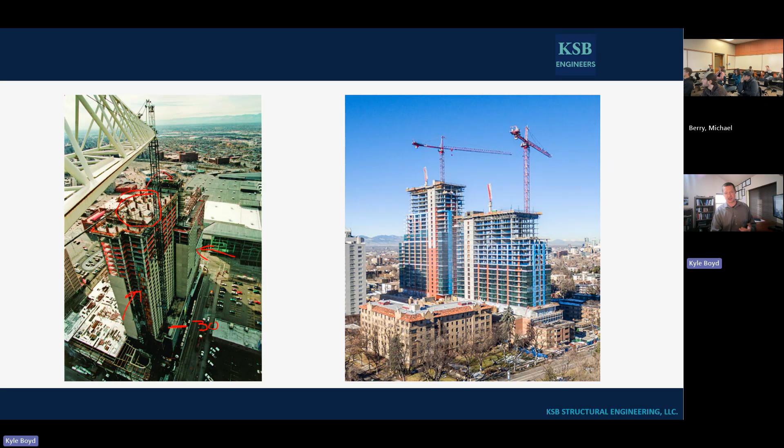As we go on, here's another building in Denver. This particular one, they were fixed on the number of stories they had - just coincidentally, it was another 30-story tower.

With post-tensioning, being able to save that foot per floor, there's over 400 feet of exterior lineal footage of skin around this building, times 30 feet of floor we were able to save, 1 foot per level, times almost $40 a square foot for your exterior skin. Once you install labor and all that, we were able to save $500,000 on the project right there, just on exterior skin.

Not even having to do things like - every foot you go up, that's additional foot of plumbing running vertically in your chases, HVAC running vertically all the way up. Again, more wind and seismic means bigger core walls, shear walls going down the building, bigger foundations. It's a domino effect of these savings.

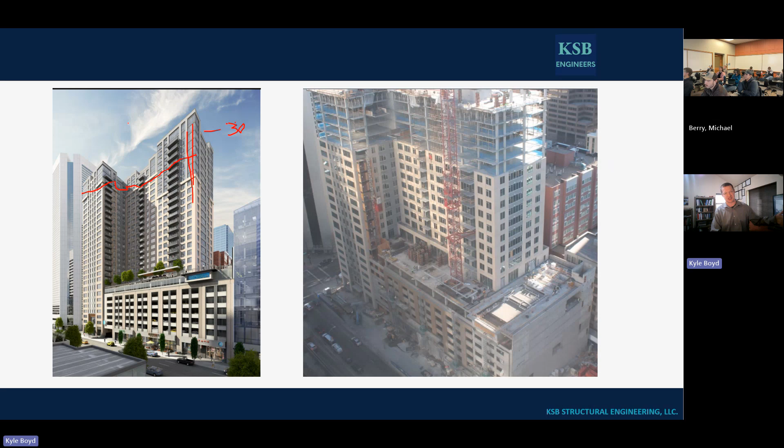With these post-tension slabs, there's so little material that goes in there that you're able to pour a floor a week if you get your schedule right.

Here's another tall tower, and you can see up here this is all the formwork for the level going up. They were able to put in all the reinforcing, pour the concrete, stress the post-tension tendons, drop the tables, set them up on the next floor, and repeat that cycle once a week, which is a crazy fast schedule.

One of the tricks of doing that is after you pour your slab, that same day, as soon as you're walking on that concrete after you broom the finish, you're over here pouring your columns on top of it.

The reason you can go so fast is from the reinforcing standpoint, you only need about a day and a half to 2 days to get your reinforcing in. You can see there's really no rebar in the slab - only a little bit of rebar over your column heads right here, you can see the column there. The rest of the rebar is just to support the PT tendons at their elevation - it's just support steel.

You might have a little bit of localized reinforcing at some blockouts. This was a shear wall right here going up, so we'll have a little bit of steel to drag some of that load in for wind or seismic into the core wall there, but really not much.

So you're able to lay this out pretty fast, accelerate those schedules. That acceleration of construction schedule you see with post-tensioning - every week they're able to shave off is a week less they have to pay for job trailers, superintendents, and what's called general conditions that the contractors use.

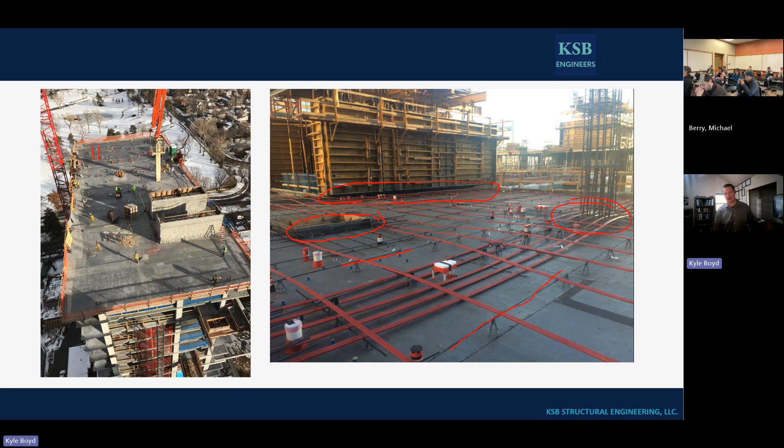Those general conditions costs are extremely high - there's builder's risk insurance, a lot of things that go into every week you're live on that project. So if you can save a month or two on your schedule, on your critical path, just by choosing a building system, that's another big domino effect of using post-tensioning.

Other areas we've seen it - here is another building we did where they owned the airspace but didn't own the ground space. So we had to do a 180-foot long transfer girder that supported the rest of the building sitting on top of it. Down below, this was owned by the city.

This was a bus lane that came through here. They were able to get an easement and put a single column right there, but they had to go up 40 feet before they were allowed to do a building. It's kind of a weird concept to think about, owning the airspace but not owning the real estate down on the physical ground itself.

To do that, we did this 180-foot girder, supporting this entire side of the building right here. We were able to do that with post-tensioning because we used the drape in the post-tensioning - it's kind of a smiley face drape through here - to pick up 80% of the building weight on this face.

On the right hand side, you can see a picture of this as we were going up, getting out of the ground. What we did was we slipped the concrete cores going all the way up, because it was a steel office building.

Once you got up above the parking levels, it was steel from here on up. So you slip the concrete cores up to get them out of the critical path. It was a parking garage, a one-way post-tension slab. Then above that, this is where that big transfer girder came across the bus lane over there.

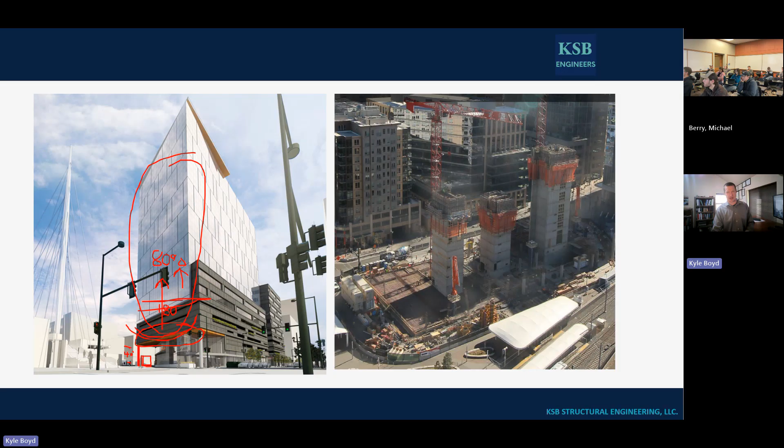Another use you're seeing in Bozeman and throughout Montana more and more is these podium structures. A podium structure is where you're transferring out 4 or 5 stories of wood up above, traditionally. That's usually because your bottom level is either too tall to do wood, or your bearing walls don't lay out with the architectural program down below, like open amenity space where you walk into the hotel, and you don't want all these walls going in there.

So you do a podium slab, which is essentially a two-way transfer beam, a two-way flat plate transfer beam that you're staring at.

This particular one's in Atlanta, and we did 12 stories of light gauge steel on top of a single-story podium. Here's a picture of that podium with all the reinforcing. There's a lot of stuff in there, but this podium was only 24 inches thick, 2 feet thick, and it was holding up 12 stories of building above it.

The podiums you'll see with wood are usually 12 to 14 inches thick, somewhere in there. The reason they can be so thin is you're using post-tensioning to pick up that load, and you're also putting pre-compression into the slab itself.

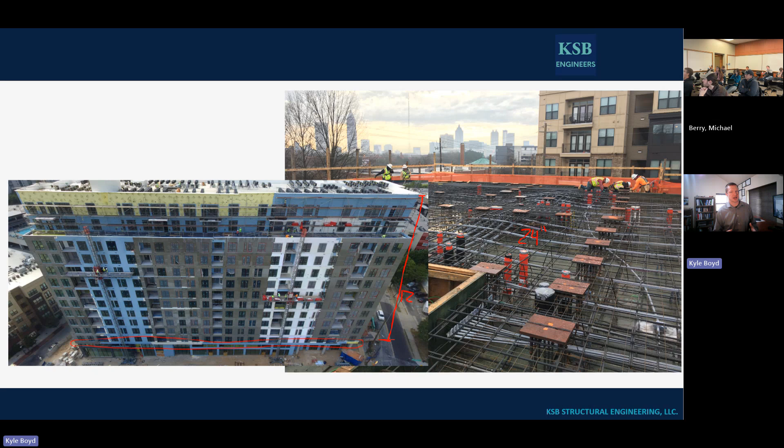So those are the applications and reasons to use post-tensioning. Post-tensioning is not new, it's been around since it started coming out in the 60s and 70s. They did a bunch of testing on it, so it's been well established for over 50 years and used throughout the country. It's not a new concept. It's new to being taught at the university level, but not new to the industry out there, aside from Montana. The rest of the world knows of post-tensioning and uses it pretty heavily.

It's one of those things where you want to put a lot of effort in your career back into professional organizations, PTI, ACI, AISC, whichever one you love. But that's not where your money is going to come from. I watch engineers put hours and hours toward these organizations but not toward business development or chasing new work or following the dollar symbol. I think it's important to balance both as you start looking at extracurricular things in engineering. Give back to professional organizations, be an active member, don't just join a committee and do nothing. But also put a lot of time toward business development and being more efficient as an engineer and as a company, since at the end of the day we're in this to make a dollar.

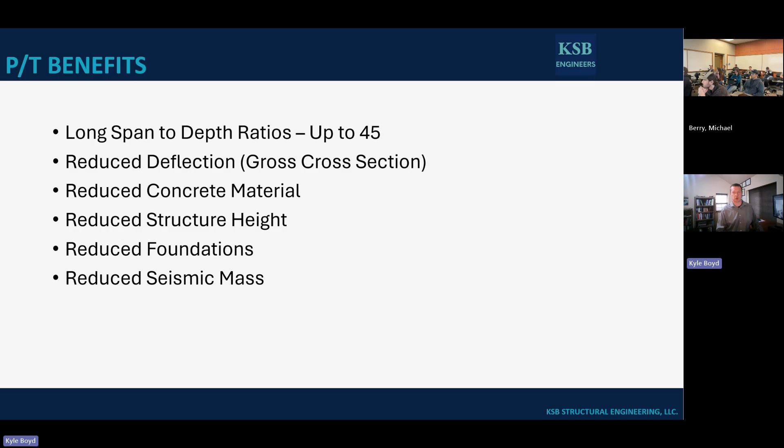So now we're going to dive into what even makes up these post-tensioning systems, what do they look like. We're going to start at the tendon level. When we say tendon, the definition is everything that's put together - the grease, the sheathing, everything we're going to talk about. Strands is just the steel in there.

Tendons, sometimes when you're doing bonded systems, can be multiple strands that run through there, multiple groups of steel. In our case, a tendon, because it's unbonded, is only going to be a single piece of element that's running through your slab. So that single piece of element is going to be a 7-strand cable.

It's going to have a center strand in the middle of it. That center strand is the king strand, and it runs right down the gut. Then your other six strands spiral around it.

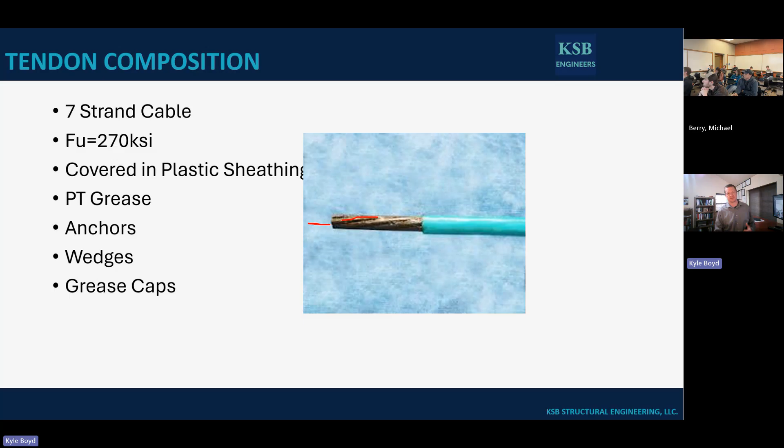It's unbonded, meaning it's never going to bond with the concrete. So to prevent that, there's plastic sheathing, that's what we're looking at, this kind of baby blue looking thing over the outside. Then there's grease coating all this stuff in there, and that grease does a couple things. One, it adds corrosion resistance to the strand. Two, it allows it to slide smoother throughout that extruded plastic sheathing.

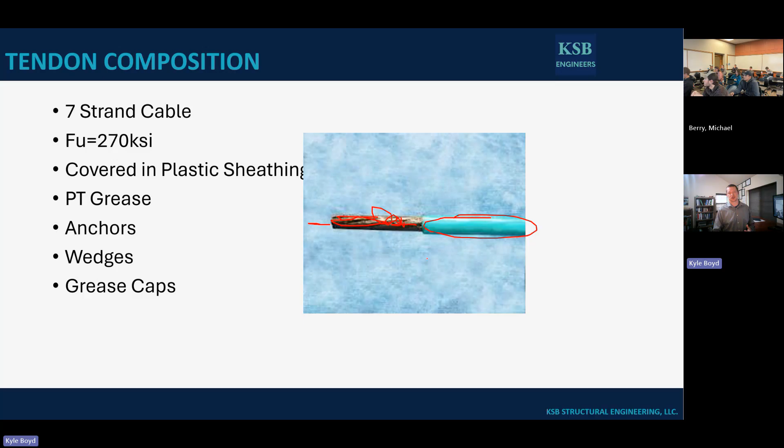That plastic sheathing isn't just like a hose sheathing. It's actually extruded onto there, so it's got the same exact shape as the strands as it pulls through. This system remains unbonded forever. So if you were to ever drill into it, the thing would pop and you'd lose all your tendon force, because there's nothing bonding it to the concrete. There's no development length, no force transfer length associated with it because it's unbonded all the way through.

The anchors, when you look at the end of the anchors, if it's elevated post tensioning, it has to be encapsulated. So you can see the red, that's just hot dipped in plastic for corrosion protection, but it's really a steel anchor. They're a little wider, like 2.5 inches by about 5 and some change inches in each direction, and that's going to transfer all your force into your slab at the end.

Whereas when you're looking at bridge girders, that force is being transferred just through a bond, through some length of transfer between the tendon itself and the concrete. Now we don't have that bond, so we have to have a way to get that pre-compression to the slab. That's going to go through one of these anchors you're looking at.

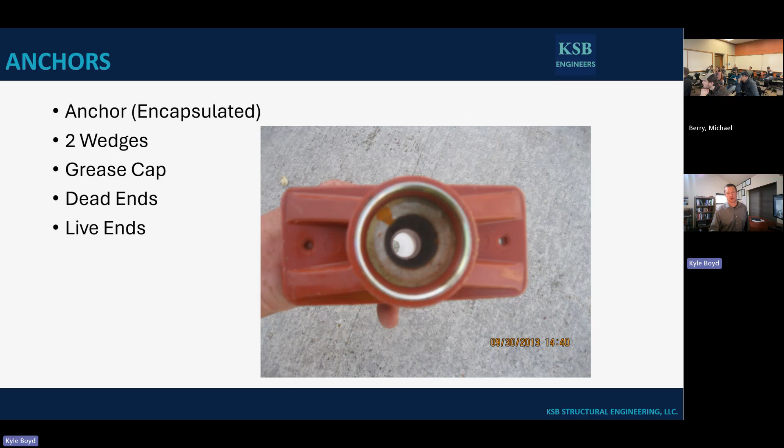So you pull the tendon, then you release it. These wedges aren't the exact shape of your cone, on purpose, but they're close. They're going to suck into this cone shape as that strand tries to pull back, and they act kind of like a Chinese finger trap on one side. The teeth grab that strand and won't let it slip.

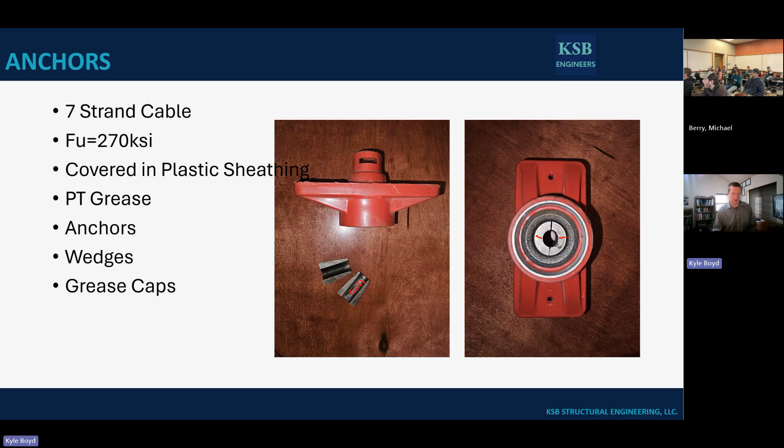That force, when you stress them, is about 33,000 pounds. You release it, and it usually drops right around to 29,000 pounds, with some immediate losses from these wedges seating into the anchor, and the elastic shortening of the slab from P over A. You're going to lose some of that, and you're also going to lose a little more from friction. We'll talk about that here in a bit. But that's how we transfer the force in.

Now again, it's got to be encapsulated, meaning it has to be waterproof. So at the end, there's a little plastic sheathing cover in this really blurry picture that covers the end for waterproofing. We already talked about the extruded sheathing. Then you have what's called a grease cap, just a plastic cap that screws into the end of this thing after you cut your tendon tails.

Now you have a waterproof system in there. And so that's what your anchorage zone looks like with these unbonded tendons.

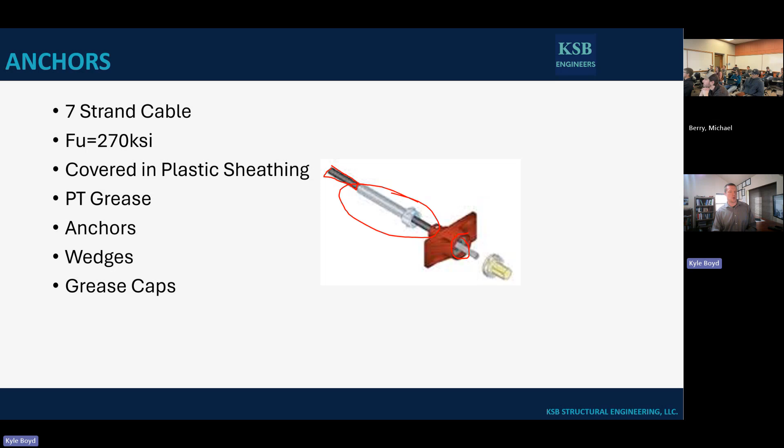So if you were to look at a tendon in the field, you're going to see the anchors, you're going to see the sheathing on there. You're only going to see exposed steel at the very ends of it. So let's go look at what it's going to look like actually on the deck itself.

You're going to have two different sides of the anchor: a dead end and a live end. A dead end is a non-stressing end, so we're not going to be stressing those tendons on the dead end side. A live end is the side we're going to be stressing on.

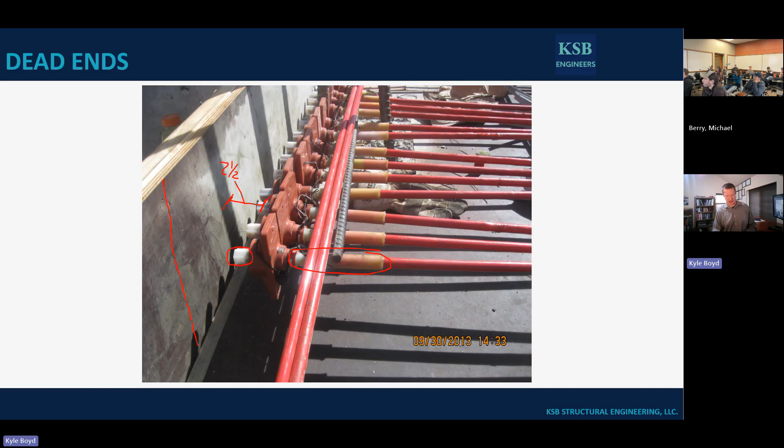You're going to pull on that tendon to 33,000 pounds. You're going to release that tendon, and the elongation you're going to get on this tendon is going to be 8 inches, 12 inches - a pretty big elongation. It's just a basic PL over AE elongation type of calculation. It's going to try and suck back in as soon as you release it, just like a giant rubber band, but those two wedges are going to capture it and not let it suck back in.

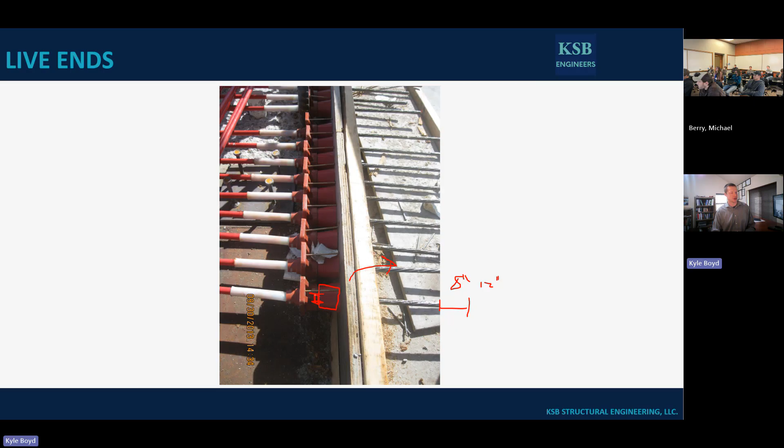It's going to transfer that 33,000 pounds into this little 2.5 inch by 5 inch anchorage zone, and then it's going to put into the slab. Now our slab's in pre-compression. We have that P over A of 33,000 pounds minus those initial losses, so 29,000 pounds right at the beginning of slab, right at slab stressing. Right at that point, we haven't gone through our long-term losses yet.

Is that so? So you guys always use the same standard size? It's because you're talking about 33 kips, but that's for a certain size, right?

What's this? Great question. So that's for a 1/2 inch diameter, and that's the most common size to use for unbonded post tension - 1/2 inch diameter strand out there. And then with the sheathing, that adds another 1/8 of an inch to it, so it's a 5/8 of an inch. So you always use number 5 rebar with it too, because that matches your thickness of your PT strands on there.

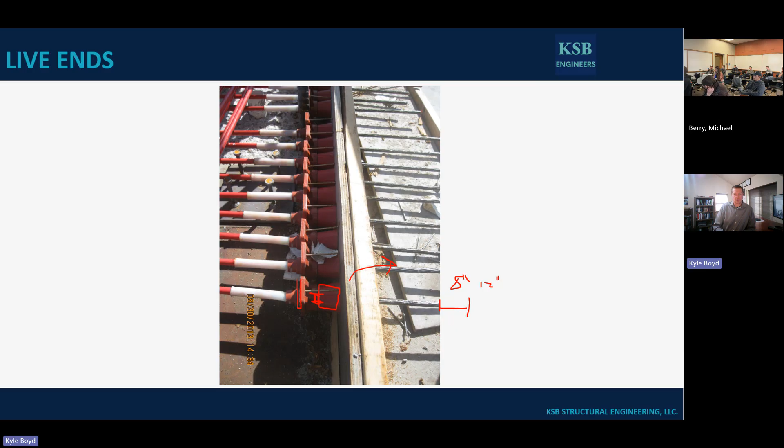All right, so here's what those tails are going to look like.

Point to go, here it is. This has the formwork stripped out below, and technically you're supposed to cut these tails the very next day before you even strip formwork, but for a certain reason we didn't do it. We fell behind. You can see the little pocket right here - that was the block out that I was telling you about that this little pocket former held, and now we're able to get into there and stress with our machine.

We're able to get on these things, pull them this way with that 33,000 pounds that we were talking about. And then when we're done, when you come back in after it's stressed, you come back, you cut these tendon tails, and then you put that grease cap on there, and then you grout that hole back in.

So you can see down below, you can just slightly see these lighter color areas - that's where you've grouted back the hole where you access those PT tendons. You can see we grouted back a couple on here already. We were kind of in the process. We're coming through and starting to cut these tails. There's two ways to cut it: there's a giant shear machine that they make that you can just shear them, or you just get in there with a torch and torch the end of those tendons off.

All right, so now we have a good idea of what a tendon looks like. We talked about it's unbonded, it never bonds with the concrete. You have these anchors at the end, a dead end and a live end, and you stress the live end, you cut it afterwards. We now know how we even get the force into the slab, the basics of it, right?

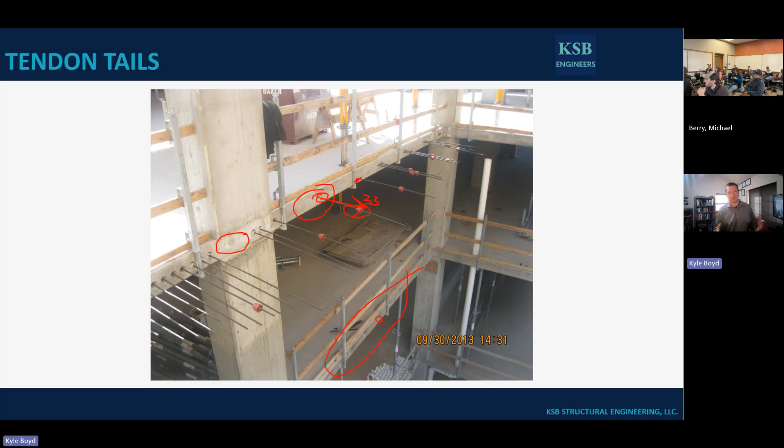So now we're going to dive into talking about what these layouts look like in the field. The first one, you're going to hear this called a lot - it's a banded tendon distribution. So in one direction over your column lines, you're going to band all your tendons together. It almost looks like a beam, but it's not. All you're doing is taking your tendons and banding them together right over the column heads.

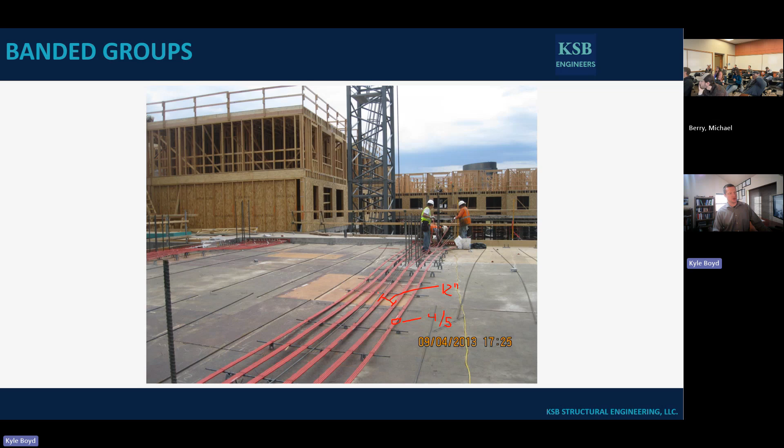But the big thing to remember is your banded tendon line - it's the first one that goes in, and it's banded just like the word along a column line. Typically you do it in your longest direction. Then what you're going to do is you're going to come in and do... Why are we banding them? Give me one more slide and we'll get into that.

So the other direction, you're going to have a uniform group, and this uniform group is spaced at either 8 times your slab thickness or 5 feet, whichever is most restrictive, right? So most of the time it's 5 feet. You can see this is the podium slab. They've already started forming the wood up above. The framer was right on us as we were pouring, and we're going as fast as we can. You can see the banded tendons running left to right, and then you can see these uniform tendons running into the page.

The other thing we can start to notice on this one especially is the drape, right? So you can see we have positive drape in the middle, meaning we have a smiley face - we're picking up, and that's in our positive flexure region. So we're picking up in our positive flexure region, and then in our negative flexure region along the column line, we're pushing down, right? So we're doing the opposite of what the slab's trying to do.

Same thing with our banded lines. A big misconception when you look at this is this thing looks very much like a one-way slab, right? It looks like this is a beam line, it looks like this is your slab line, and you're pushing down on your beam, and this beam's picking up and bringing it to the columns.

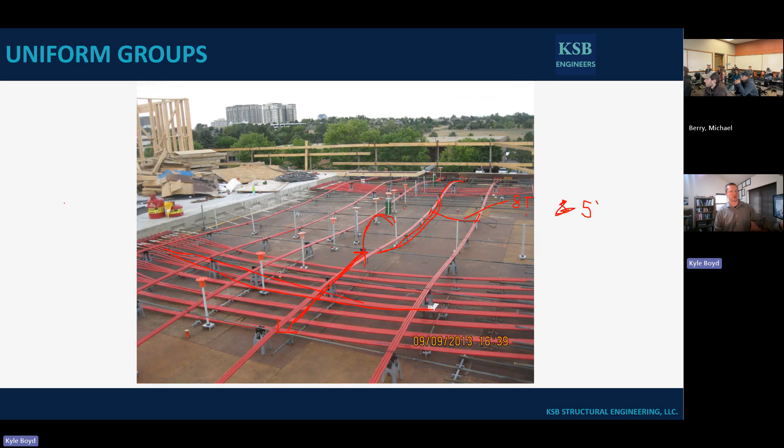The challenge was that basket weave was hard to install. Remember, what we showed in the previous slides was first you put down your banded tendons, then you put down your uniform tendons -- it's a real simple installation. Well, this way is too much of a basket weave, and they were having a hell of a time in the field trying to put it together.

So down at UT Austin in the 70s, they said, let's do a test and design it exactly the same, but take our tendons and band them together in one direction. The design's exactly the same -- nothing's changing analytically. All we're doing now, instead of having our tendons spread out with a column strip and middle strip, is saying, hey, it's equivalent frame, and we're going to push it all together into one direction.

So now when we analyze slabs, we look at it as equivalent frame. You're really looking at your trib width, and analyzing based on here's all the tendons -- we don't care where it is within that width. It's just like a piece of rebar in a beam: you don't care where it is left to right, you just care where it is up and down. Now we're doing an equivalent frame, and we're still going to do the equivalent frame in the other direction.

And now we have a much easier way to do that. This is the way that everybody does PT tendons since the mid-70s. And the basket weave, as soon as this was proven and code adopted, it went away.

Recently, just this year, ACI has come out and said now you can band them together in both directions. This had to do with a lot of research over the last 10, 15 years. When I was in grad school, my professional paper was on banding in both directions together, and I did a bunch of analytical research. We brought in PTI, then went to Virginia Tech and did third-scale testing on it. A lot of the members that sit on PTI, that design committee I'm on, also sit on ACI 318. They got fed up with ACI 318 taking forever, so they started their own code called ACI 320, and got 318 to essentially say okay, 320 is another way of going about doing it. It just came out this year, and in this year's code, it now says you can band tendons together in both directions.

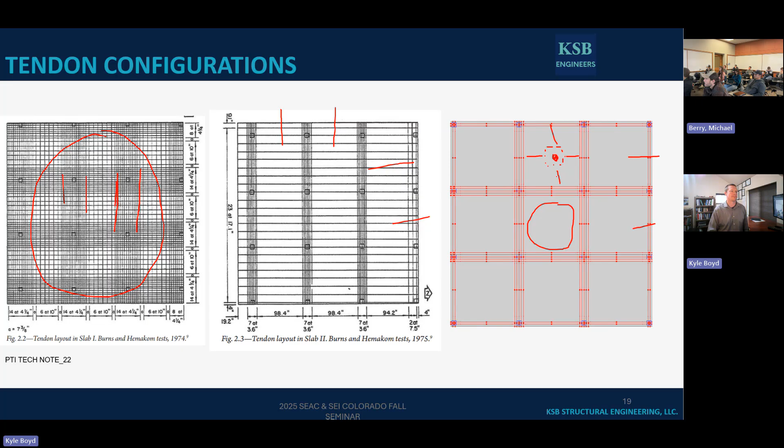Is there mild steel in the middle of all that stuff, or is it just very little? It's 0.1%. For an 8-inch thick slab, it's equivalent to number 4s at 24 inches on center each way for bottom steel. You don't need it for any analytical purposes. The only reason we put it in there is we thought the only way we're going to get through ACI 318 was by having some magnitude of steel in there. We also said, what happens if you potentially overloaded this area with a giant point load, way bigger than whatever the design load was, but you never know what the future is going to bring. You could potentially have this hybrid of a punching failure with no reinforcing, or it could start as a punching failure and then mitigate out to a flexural failure in both directions. You could potentially maybe someday get something through. It had to be an extreme load, so we put it in there just to provide some sort of ductility for an extreme overload event. But we don't use it for any of the analytics for strength or service or anything.

So that research they did, they looked at the shear lag effect, right? Because you're putting it very concentrated and it's kind of out to the unreinforced area. So the shear lag Berry's talking about is, when we look at this banded tendon layout, we have giant pre-compression here, same here, but there's a shear lag of that pre-compression getting out to the slab that looks something like this. This area here really has no P over A to it in that direction. In the opposite direction, we have so many tendons that the shear lag is so small you really don't notice it. But that shear lag has been present this whole time in one direction, and there's never been any issues with it. So now you just have the shear lag in two directions. Some engineers have tried specking some rebar, putting a little rebar in here. It's added rebar, you don't need it, it confuses everybody. We've never had any cracking happen there, because you also have pre-compression in this direction getting in there too. So through strain compatibility and Poisson's ratio and everything, you still have some magnitude of force dumping in that direction anyway from your perpendicular pre-compression. We talked about this a lot, and we were very careful when we did the test to do it without that steel in there, so nobody could come back and tell us the testing you did had it in there and you still need it, because nobody at PTI really likes that steel in there.

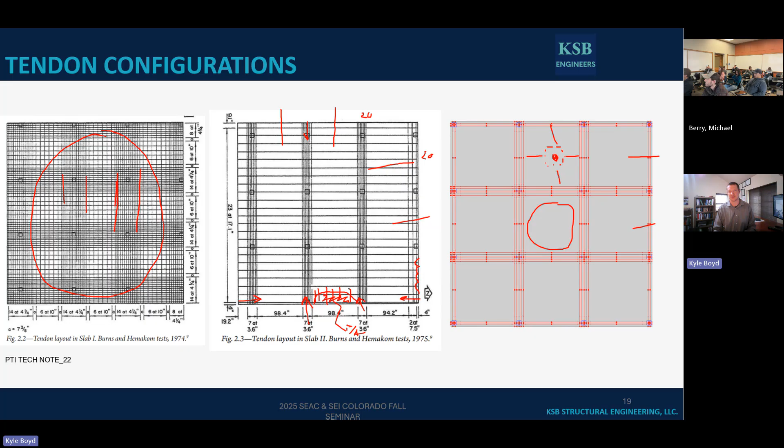Has it been used yet, Cal? Have they done double banded yet? Not how we're showing it, it hasn't, but it has been used just with more mild steel. There's been a couple slabs, and in one of the later lectures we'll show them where they've done it in New York City on a high rise, the big tall high rise. They did it, and then they did it down in Florida on a couple projects too. Because it wasn't code adopted yet, they had to put in the minimum area of steel that you would with a mild slab to get it through the building department.

Okay, so we talked about the band tendons, the uniform tendons. There's a couple rules that you have to follow. One is inside your rebar cage, you always have to have 2 tendons here and here, right?

And you can see these 2 tendons right there. That's integrity steel. In case there's ever an extreme event where the slab did punch through and collapse, those 2 tendons, believe it or not, are going to hold up the slab. And that was seen in Northridge. There was a lot of 2 tendons in between that were holding up the slab, even when all the reinforcement around the punching area completely crumbled from the shears and everything. You still have 2 tendons just barely holding up that slab.

So that requirement still sits. You're supposed to have that in each direction. So one thing this picture is missing is there weren't 2 tendons going this way through the column head. However, there is a buyout if you can't get them in there where you can put a couple bottom bars in here as well. But that's a pretty big requirement that's required in there.

The other is you can see there's just a little bit of mild steel over the top. If you do the strength level calcs, you don't need this steel. However, that steel is put in there for 2 reasons. One, it helps with crack control because you're getting a giant, if you look at your moment diagram, you're getting a giant spike in your negative moment. And so you're going to get some sort of localized crushing right here. The spike's probably not real. It's probably more rounded off, but in FEA, it's going to show you this spike. But you're going to get some little micro cracks there, even though it's an uncracked slab system.

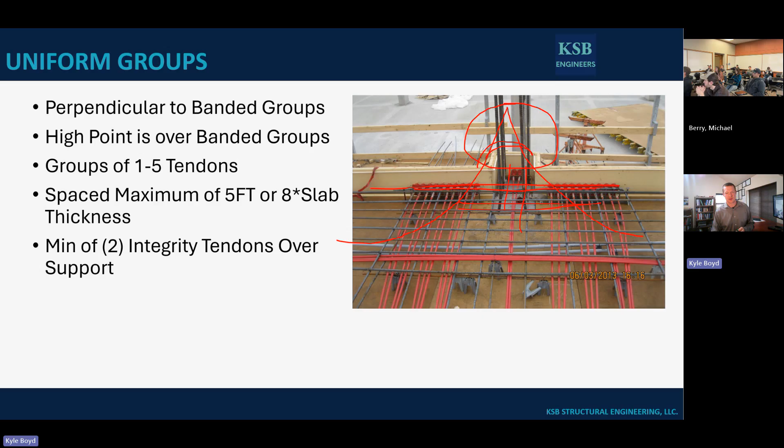Here's a beam, another area. So we were showing 2-way slabs. Here's a beam. This was a transfer beam. It was supporting, I forget how many stories, about quite a bit. And you can see all the tendons there, yellow. The color makes no difference. Different suppliers have different PT tendon colors. So for whatever reason, this installer bought tendons from 2 different suppliers. But you can see the yellow down there.

And it's going through and it's picking up all the forces of this column in the middle, about where this guy's vacuuming there's no column down below. It's this giant open 60-foot wide beam down below. So PT works great in transfer beams. I showed that big, tall 40-story Hyatt building where it's transferring out 30 stories above the 10-story convention area. That's another great area for post-tensioning.

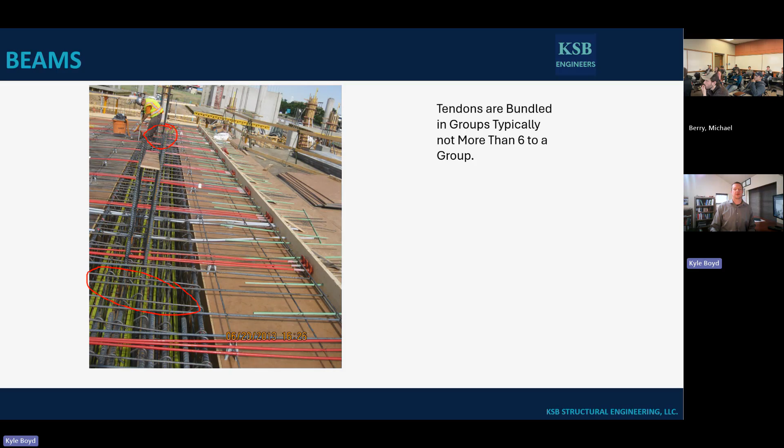On there, areas that aren't great for post-tensioning are little tiny beams. You don't need them in these little tiny beams. Typically, you have a stiff element. There's no reason to try and pull them up. This engineer specified them. You can see just this cluster of just even trying to get the PT tendons into the beam with all the beam steel going on. You can see all the stirrups. They tried specing some unreasonable amount of stirrups because there's some junior engineer who didn't know what they were doing. And yeah, just total cluster.

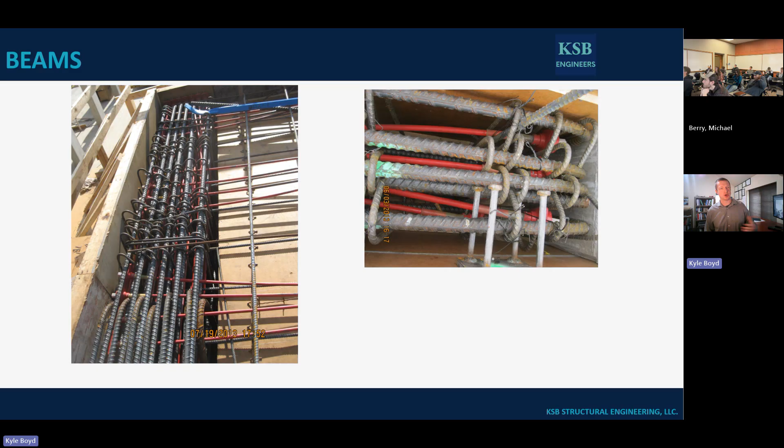This ends up becoming issues. And I've got pictures of where this became big issues. And so when you have little beams, just leave the post-tensioning out of it. Only put it in there if you need the post-tensioning. Don't just put it in there just because you're doing it everywhere else on it. Here's a picture of the end of that transfer girder we were just looking at.

So you can see all the anchors right here of all the PT tendons that are in there. Pretty big transfer girder, you can see those anchors. On the other side, we have the stress - that's the dead end, you don't see the tail sticking out. On the other side, we have the live end, that's where we're going to stress from.

Great application for using it in a beam. Big transfer, we have lots of room, lots of real estate to put in the post-tension tendons.

Again, another example on the right, terrible application there. We're trying to tie, I don't know, 20-something tendons into this beam. We can't even get it in because we have these honking number 9 or 10 bars here and here, so we can't get in at the right elevation. It's down lower - it was supposed to be up high in this plane. Because we couldn't get up at that elevation, we ended up with a frowny face curvature right here, nothing to support it. We actually ended up blowing out all the concrete below this on this particular project.

Another issue where I have a lot of beef with this detail - if you have rebar in a beam, don't hook it down when you have a slab right here. Take that rebar back into your slab, because you're still going to have that negative moment just through stiffness, so you're going to form a crack on the top of your slab. Take that bar, make it continuous through, just in general when you have a slab element like that.

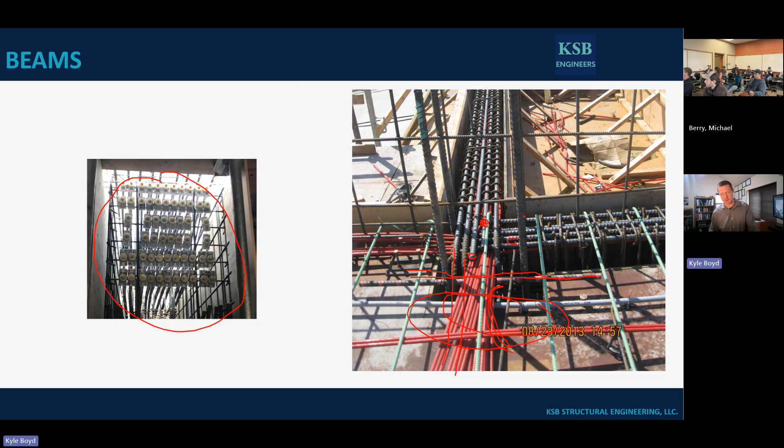We're going to go over 3 more slides here, then we'll call it because I know we're getting up against time. So the tendons, as they sweep, we talked about them vertically picking up because there's that curvature. Well, horizontally, it doesn't distinguish between vertical and horizontal curvature. You can see this curvature right here between the tendons.

That drape, call that a drape right there, that's putting a huge horizontal force that way in the slab. That can roll out if you don't put in hairpins or reinforce it. This is a block out for a mechanical shaft - those tendons will just rip right into that block out. So you've got to reinforce it properly when you have these type of sweeps. I'm giving you guys what type of sweep you need to start putting in these hairpins. These hairpins are just these U-bars right here, all they're doing is dragging that load back into the concrete itself.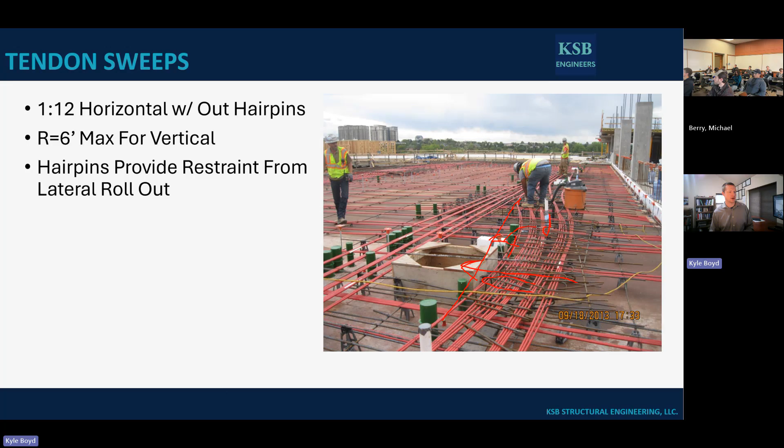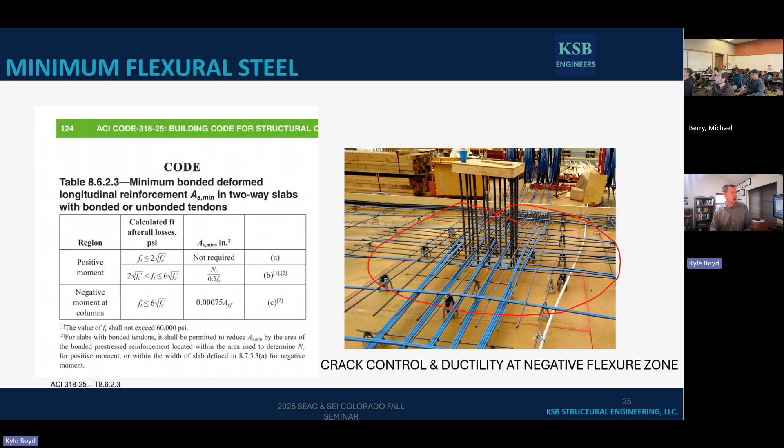We already talked about the minimum flexural steel at the top. There's some that we'll get into - ductility, crack control. You really don't need it for strength, your PT tendons are usually more than enough. So we're not going to get any further into that particular one. In future conversations, we're going to talk about minimum area of steel if you exceed certain stress limits.

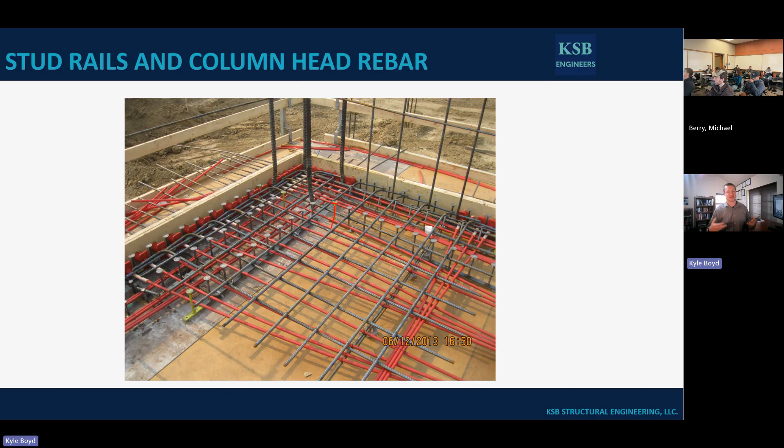At your column heads, they're thin slabs, so we're getting great span to depth ratios. What controls our design? It's going to be deflection. Well, we're going to overcome deflection by picking up 60 to 80% of our load. Then the next big thing is punching shear because it's so thin. So you put in these stud rails - these little rails you see right here, act just like a stirrup for shear reinforcement. That's how you reinforce these slabs for punching shear, because that really becomes one of your controlling design factors.

So anyways, I think right here's a good stopping point. What we're going to talk about on Wednesday, we're going to dive deeper into stressing and the stressing sequence, the forces, pocket formers, edge forms, how you have to access the stressing like we're talking about now. And then from there, we'll start diving into the fundamentals of restraint to shortening, other things you have to think about, and then we'll touch design - we'll start actually getting into the engineering side of it.